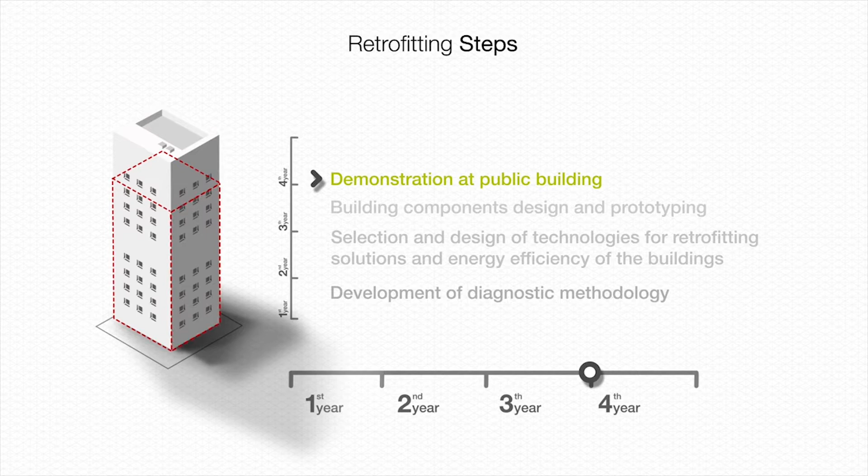RESSEEPE Project. Nowadays, public buildings have a huge impact on the total energy use in Europe. The EU, through the funding of the RESSEEPE project, aims to reduce this energy consumption and, in consequence, to reduce the CO2 emissions due to public buildings. RESSEEPE is a 48-month project. After the development of the diagnostic methodology, retrofitting and energy efficiency technologies are designed and demonstrated at building level in different demo sites. At the end of the project, the impacts of the technologies developed were assessed and their replicability evaluated.

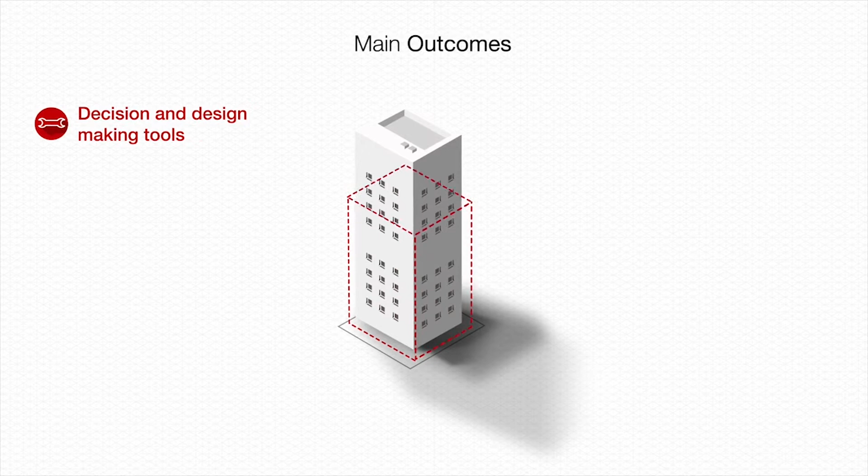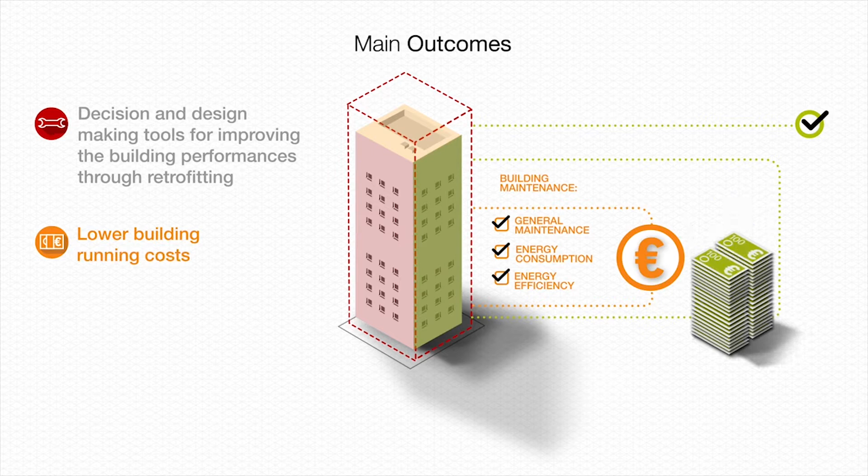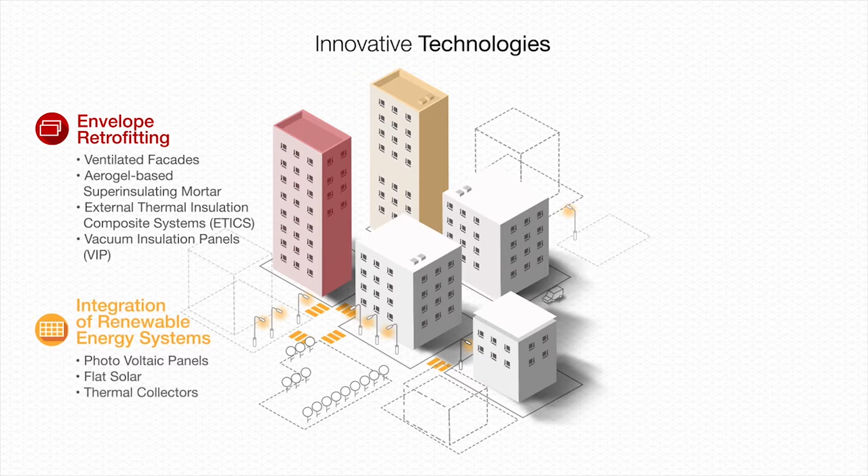The main outcomes of the project were combined decision and design-making tools for improving the building performance through retrofitting. This approach lowers building running costs and provides a technologically affordable cost of entry. A standardized low-energy concept deployed in the demo sites and the best practice approaches highlighted in a book. Several remarkable innovative technologies and materials have been integrated into the retrofitting process as an existing technology, improved or new prototype design. RESSEEPE demonstration sites. The first demo site is Balderskolan Secondary School in Skellefteå, Sweden. The second demo site is composed of 2 hospital districts in Barcelona, Spain. The third demo site is composed of 2 buildings in Coventry University, UK.

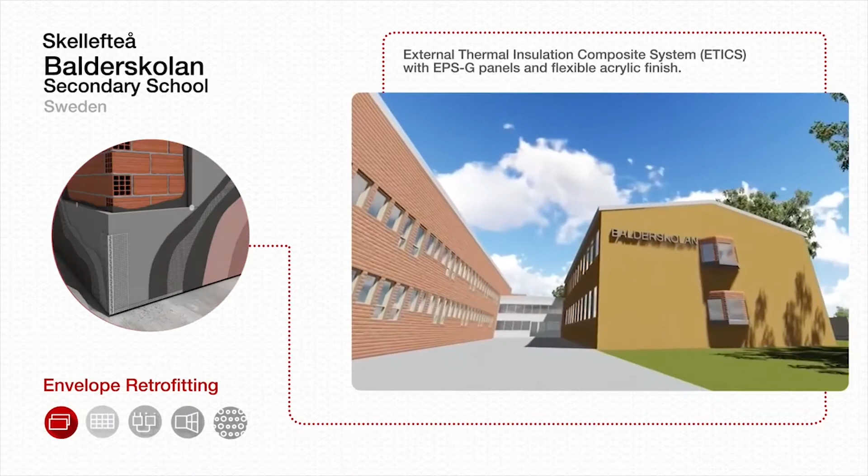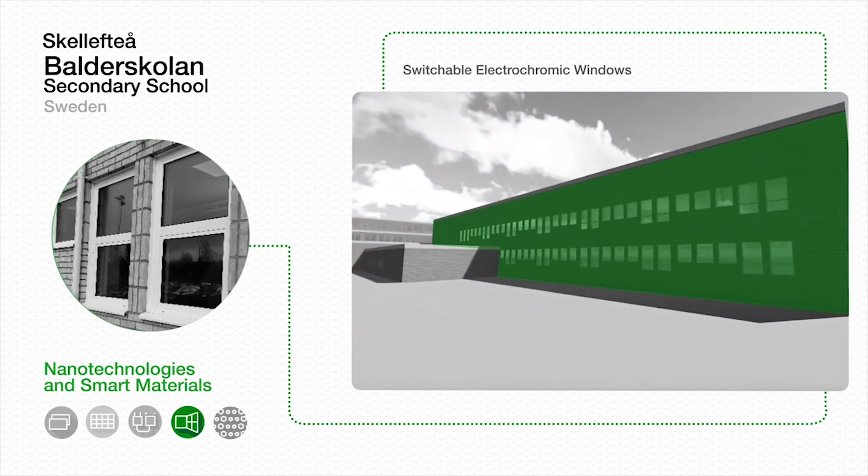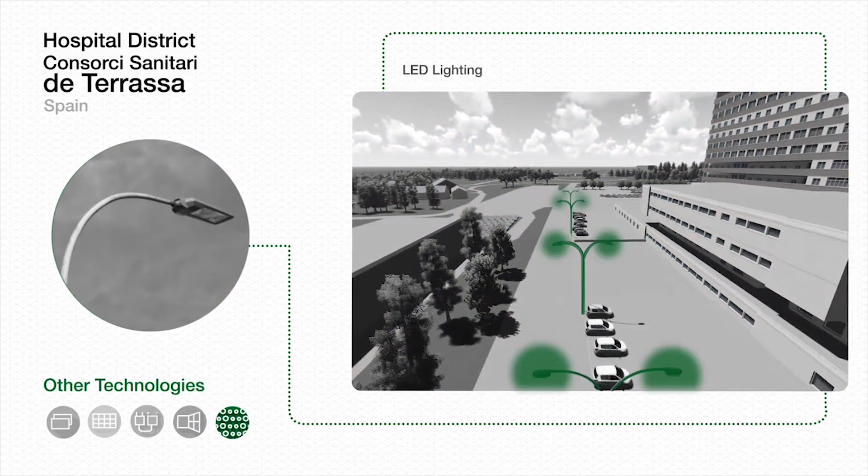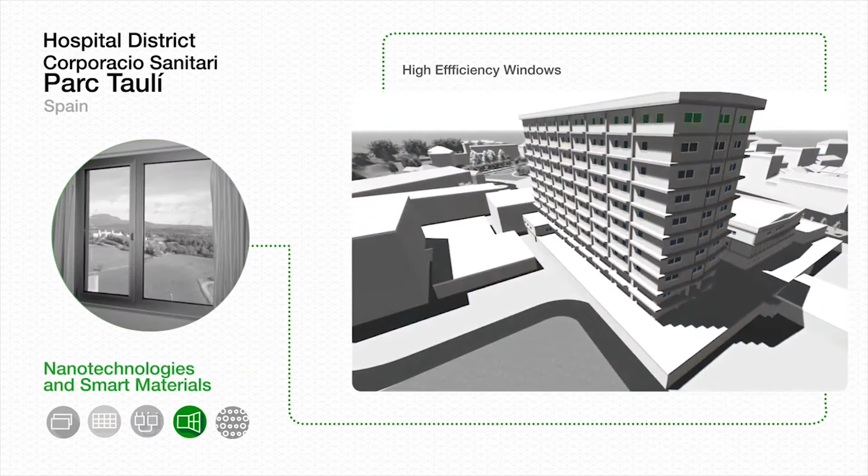The efficient technologies included are: Balderskolan Secondary School: external thermal insulation composite system, vacuum insulation panels, high energy efficiency windows, switchable electrochromic windows, LED lighting. Consorci Sanitari de Terrassa: external thermal insulation composite system, thermal solar plant for DHW production, high energy efficiency windows, LED lighting. Corporació Sanitària Parc Taulí: EPSG panel installation, thermal solar plant, high energy efficiency windows, internal and external LED lighting.

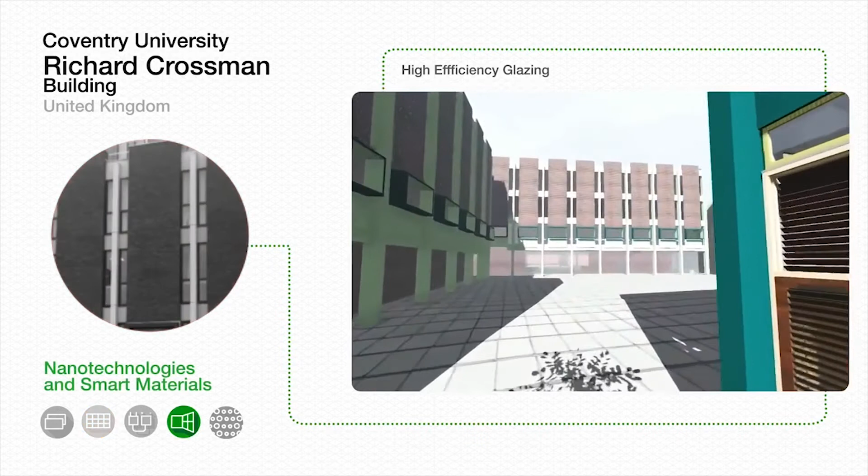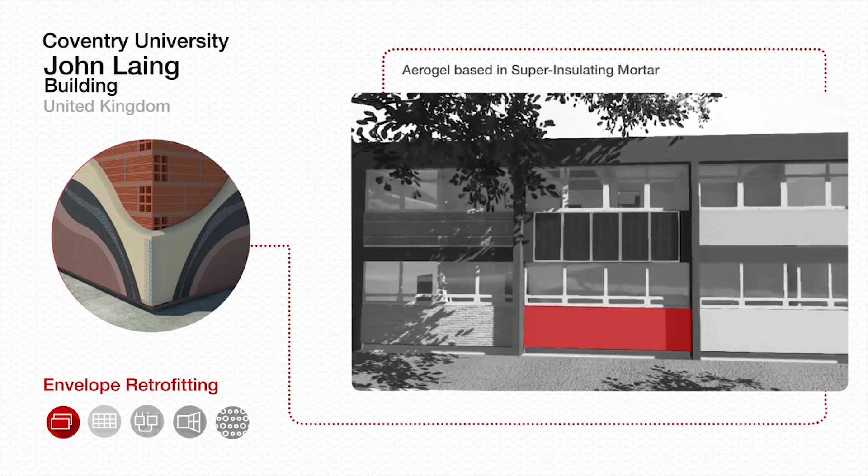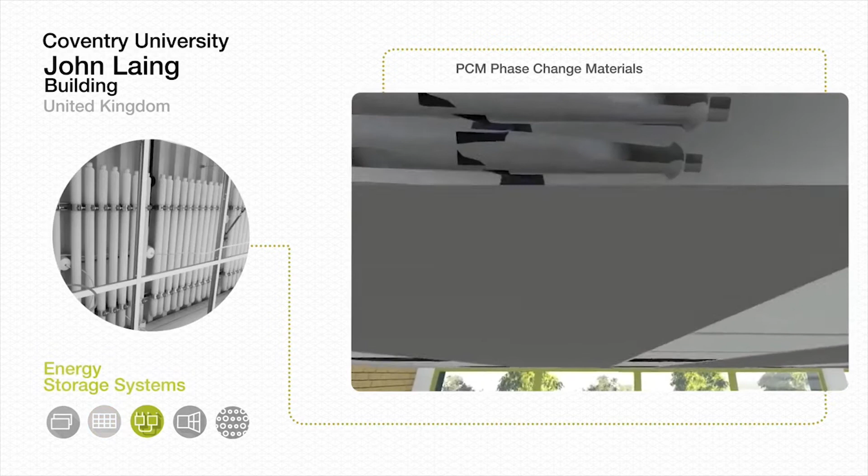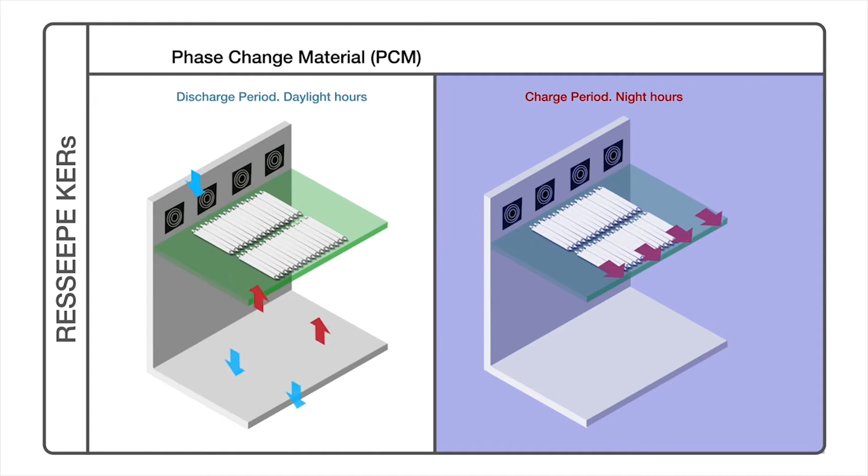Richard Crossman building: solar PV panels, high efficiency glazing, curtain wall, roof improvement, LED lighting, BMS Building Management System. John Laing Building: EPSG panel installation, aerogel-based super insulating mortar, vacuum insulated panels, ventilated facades, building integrated photovoltaics, PCM phase change materials, EC film. RESSEEPE KERs. Successful experiences of the project. All technologies have been tested and pre-qualified. The performance reporter and decision support tool retrofitting planner at the building and district level have been developed and tested. The prototypes developed have been fully designed, manufactured and tested in the demo sites.

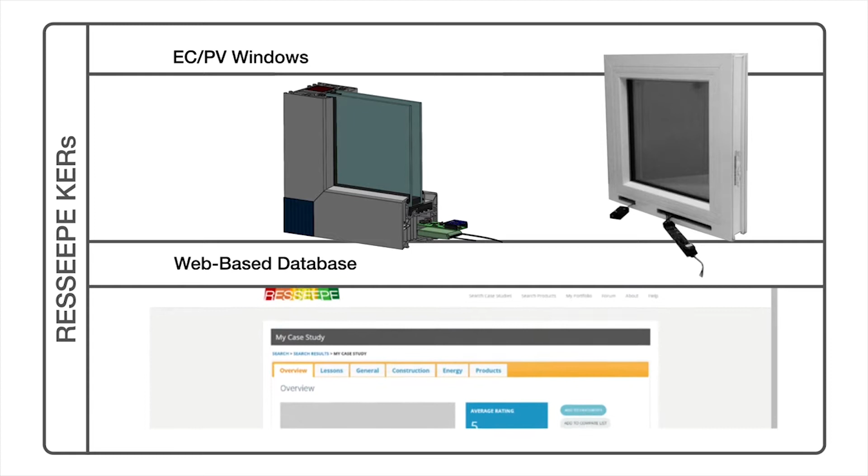I hope that's made the project a little bit clearer. So basically, I'm going to run you through some of the innovative technologies we selected within the RESSEEPE project. We consider these as key exploitable results because they started within the project. They started at a very, very low technology readiness level. During the project, they progressed quite well, and we've managed to demonstrate these technologies on the demo sites. So these are some of the technologies we've selected for the RESSEEPE project.

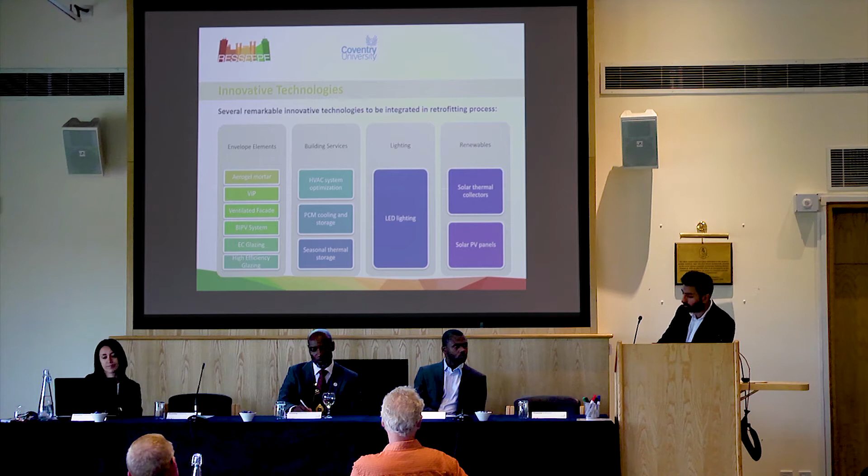We decided to choose different types of technologies rather than sticking to, say, external insulation. So we decided to go for some envelope elements, some building services, some lighting, and some renewable technologies as well. As you've seen previously at the John Laing building, we had aerogel mortar, vacuum insulated panels, the ventilated facade, which I'll explain a bit later on in the presentation, building integrated photovoltaics, electrochromic glazing, and high efficiency glazing as well. Regarding building services, we had HVAC system optimizations, PCM cooling and storage, and seasonal thermal storage. We chose LED lighting along with solar thermal collectors and solar PV panels.

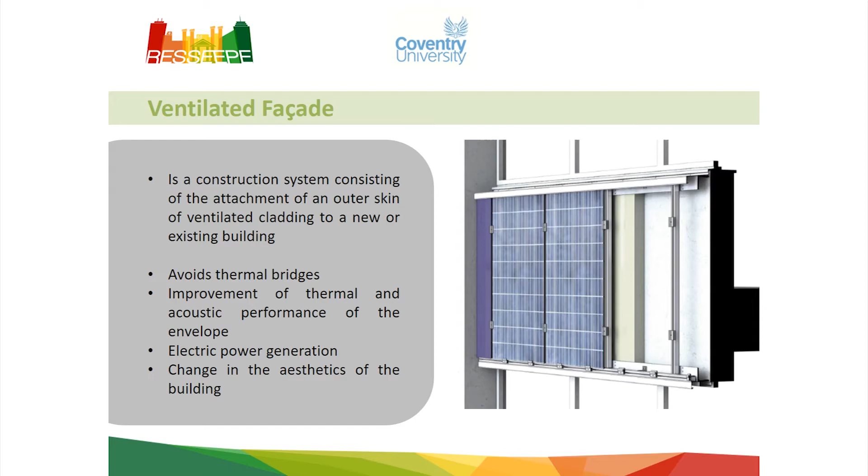So let me quickly talk you through the ventilated facade I think you saw at the John Laing building, which was the middle one. The ventilated facade is a construction system consisting of different elements. Within the system, we have building integrated photovoltaics, which were at the front. And we had an air gap for ventilation, and then we had vacuum insulated panels that were attached to the wall directly.

This system is very well-performing in the sense that it provides different energy measures and savings as well. Some of the advantages are they avoid thermal bridges. It has a very good thermal and acoustic performance, considering we're using vacuum insulated panels, which is a very good technology. We're producing electricity right now.

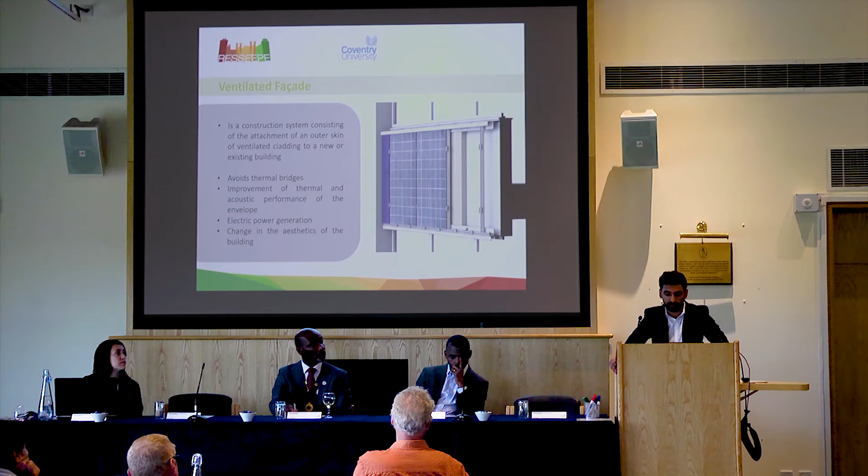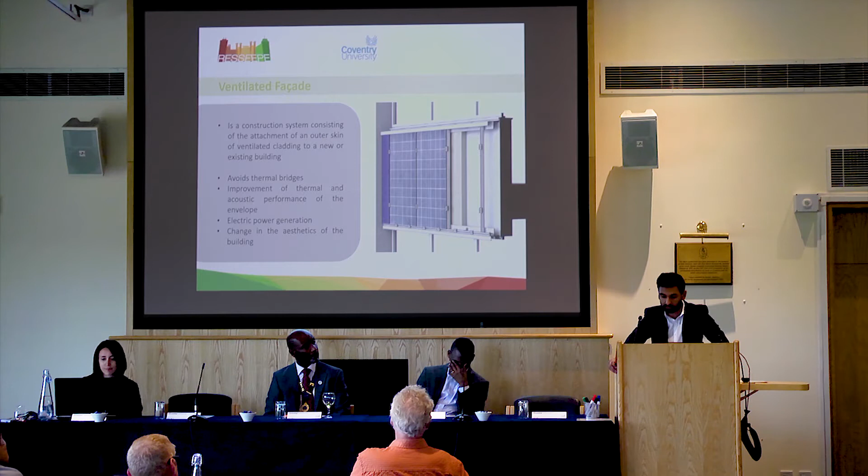We didn't have a chance to see, but the PV panels are connected inside the lab downstairs, just below the ventilated facade. So in that room, we have the inverter, we have the batteries in there, which at the current moment have a light bulb load connected, just for testing purposes, to see if the solar panels are actually producing some energy. So we'll be having results for that at the end of next month, which is the end of the project, hopefully.

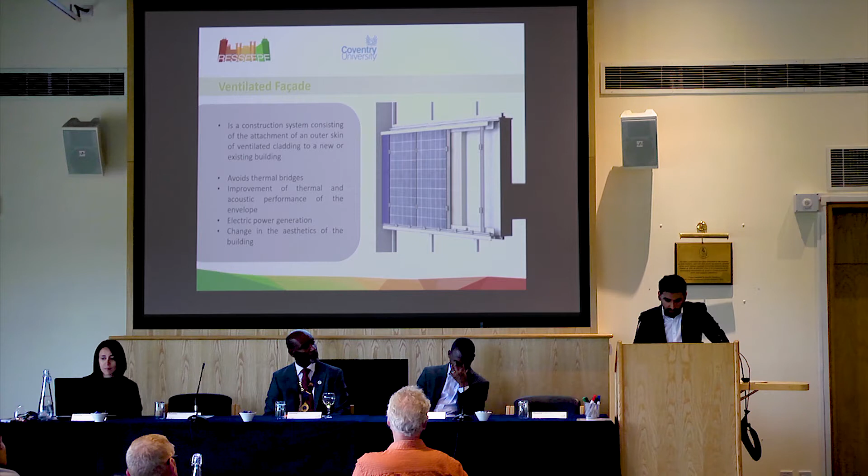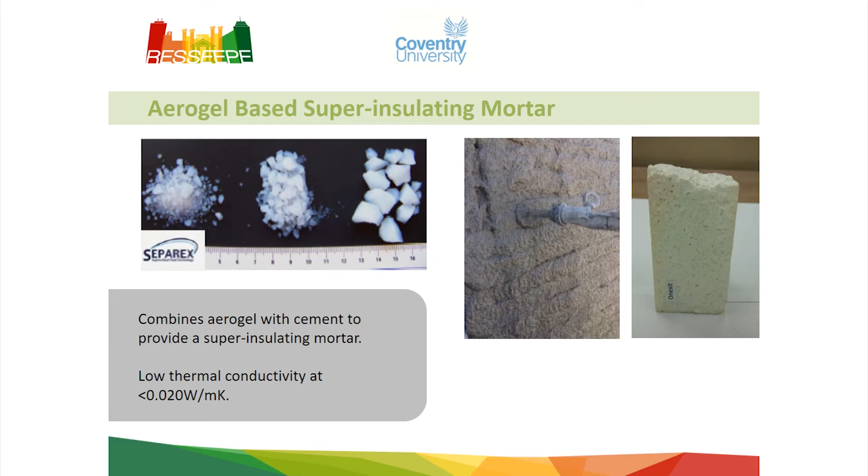So the next technology was aerogel-based super insulating mortar. This is a silicon-based product. I think it's 1% silicon, 99% air, something like that. So we decided to mix this into a mortar and install this at the John Lamb building. As we mentioned previously, the John Lamb building was used as a lab scale testing site.

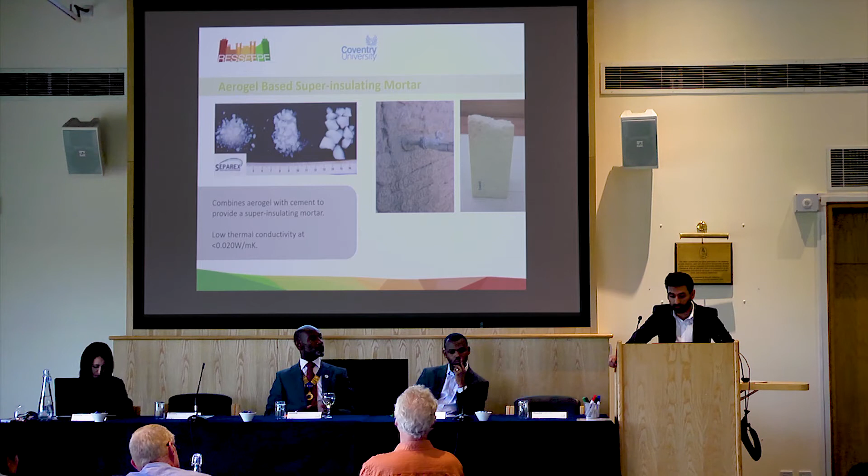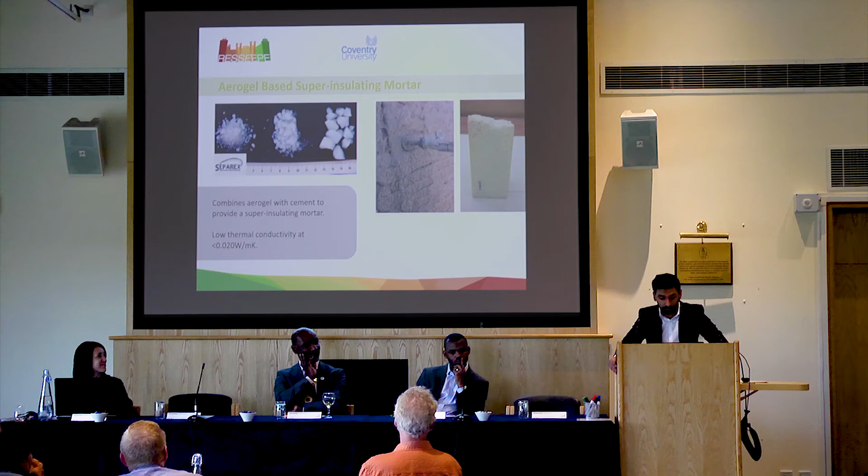So some of these innovative technologies we thought would be well tested at the John Lamb building. So this is one of the technologies we installed. I think Monica will cover the installation procedure, but it was a very difficult technology to install, as not a lot of people know how to install this technology or know about this technology. But this will be covered later on.

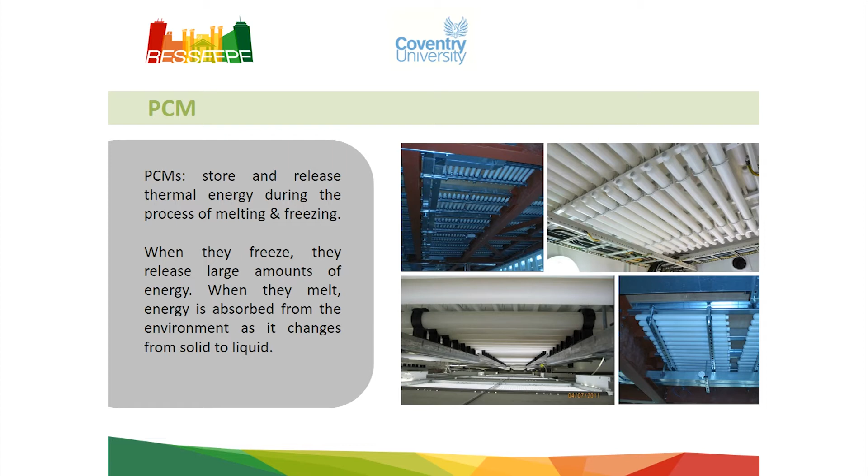PCMs, I guess you've had a lot of information about PCMs today. They basically store and release thermal energy during the process of melting and freezing. Obviously, when they freeze, they release a large amount of energy. When they melt, the energy is absorbed, going from the state of solid to liquid and back again.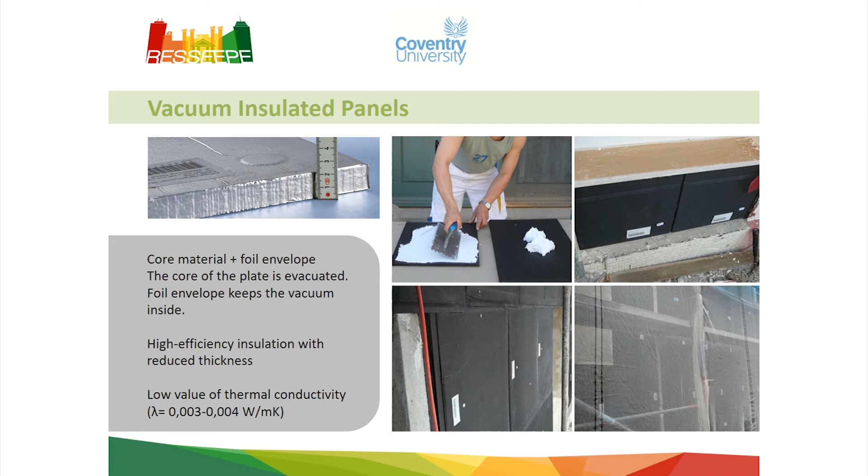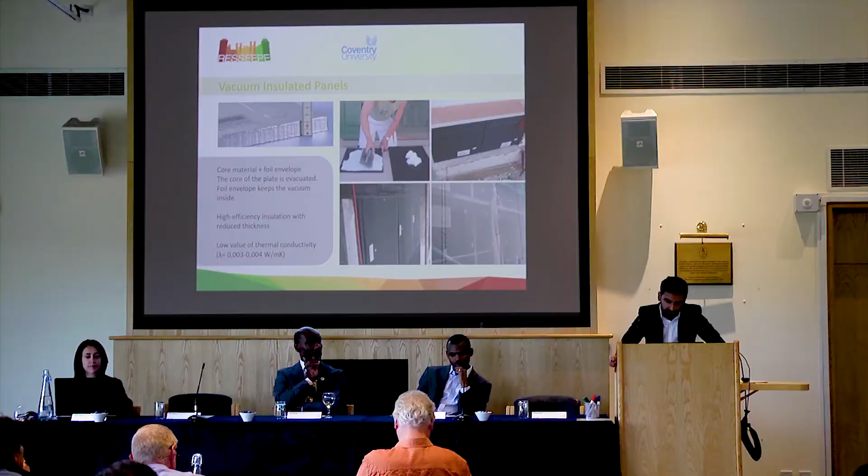Vacuum insulated panels. I'm not sure if you can see through the ventilated facade, but it's a foil-based material. So the core material is in a foil envelope. The core is a fibery material. It's quite powdery as well. So the company decided to use it as a vacuum. So we took all the air out, vacuum packed it. It doesn't allow air to go through at all. It's high efficiency in insulation and has a very low thermal conductivity.

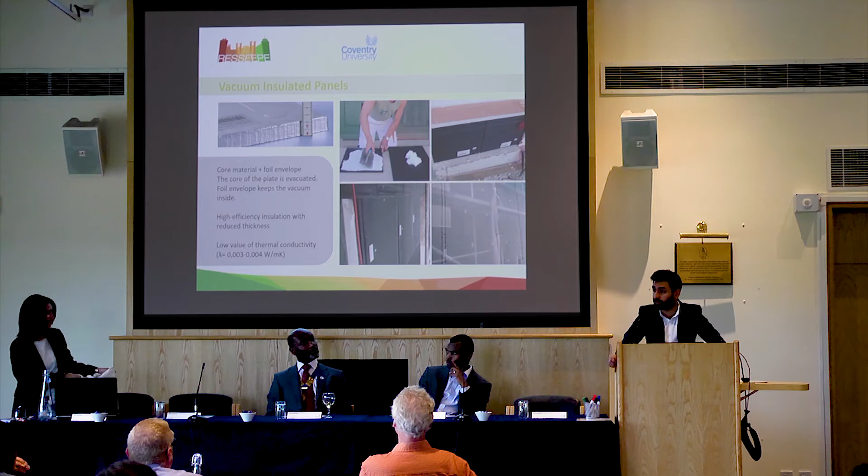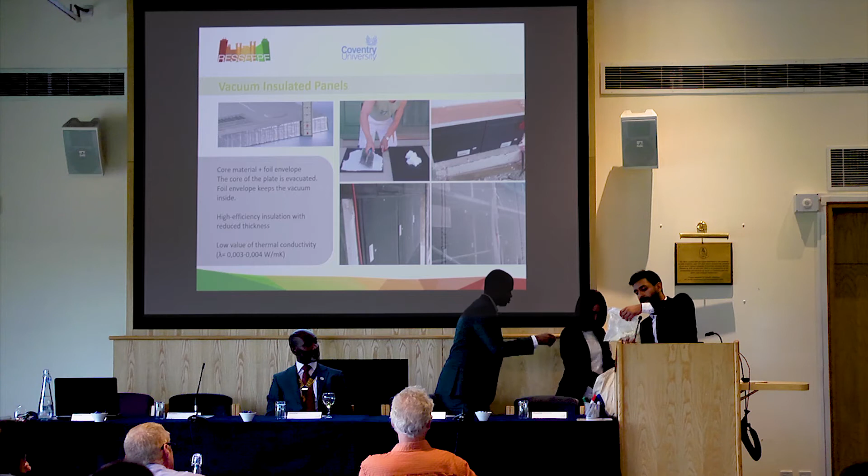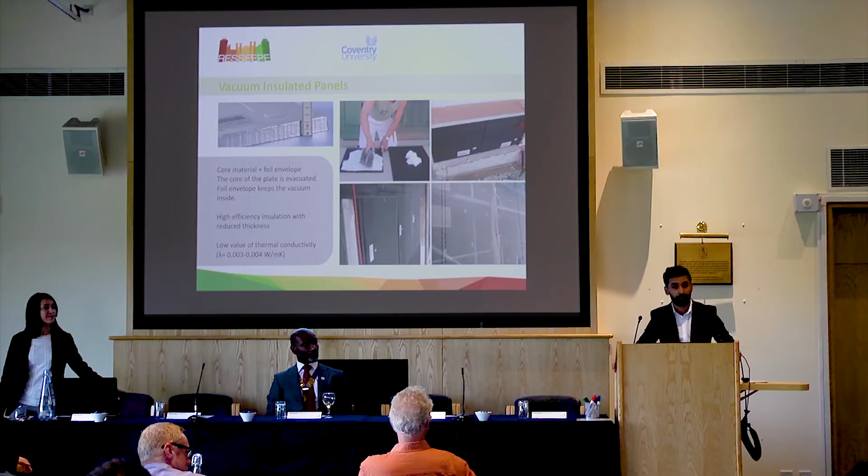So this is a very well-performing technology, and we are seeing this in the results at the moment, and hopefully we'll be seeing them in our final analysis. I think Monica has a few examples there she'll be passing around. That's the aerogel mortar. That's the mixture it comes in. So the powder stuff in the bag, that's the aerogel mortar. You just have to add water and then it's ready for installation.

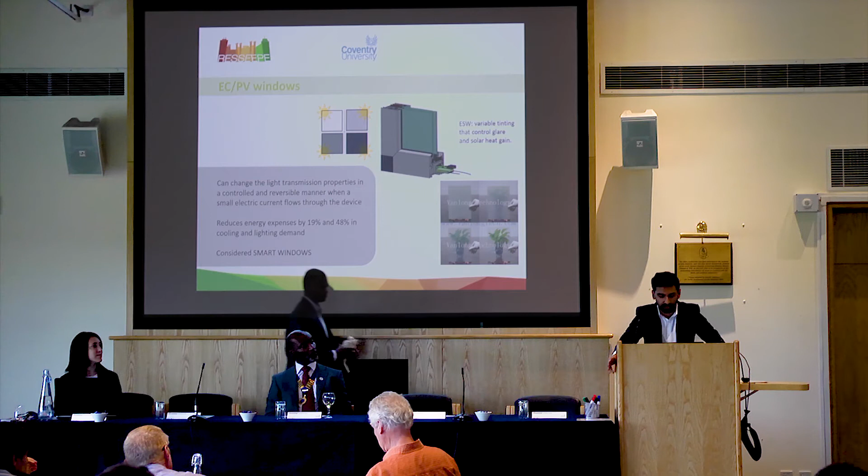So while you guys are looking at the samples, I'm going to carry on. I'm going to continue. I guess we'll stay on time.

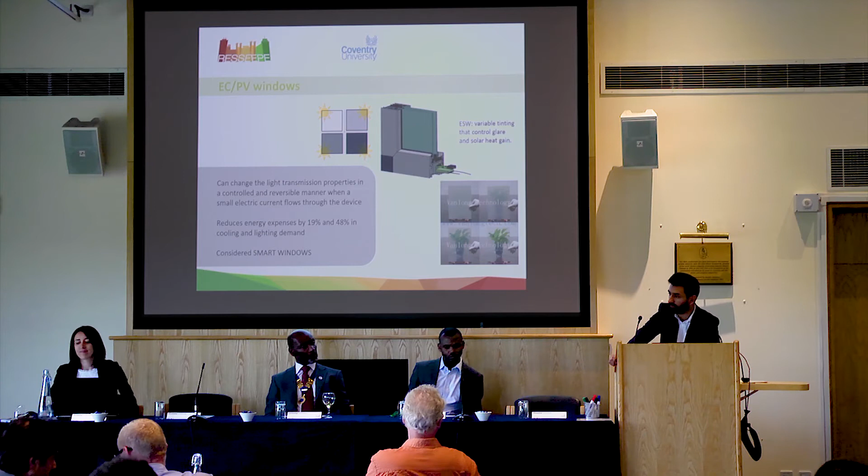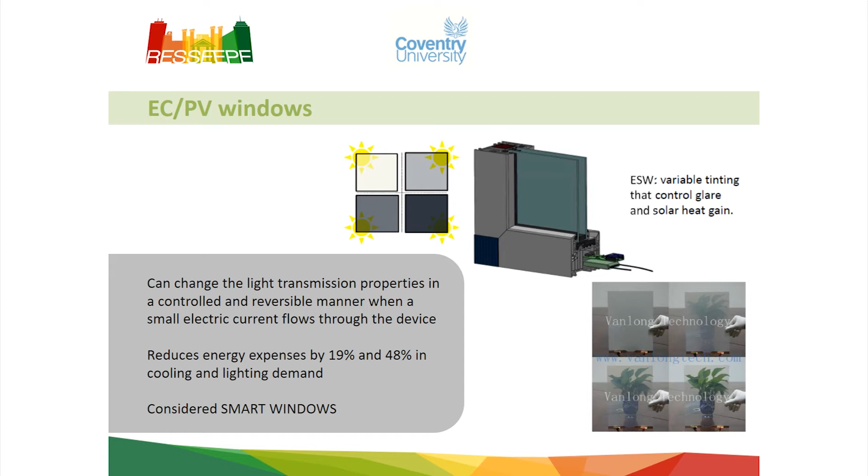Yeah. Right, another technology that was made as a prototype in the RESSEEPE project was electrochromic windows. This was done by a partner in Switzerland, if I'm not mistaken. They created their own EC window. They did their testing in the lab for this. Unfortunately, it was not ready for demonstration testing, so they could not make an electrochromic window building-size for a normal window. It was roughly around this big, 30 centimeters by 30 centimeters. So we could not put that at a demo site to install and do the testing.

So they did some lab testing, and they found that it was very efficient. It reduced energy expenses by 19% and 48% in cooling and lighting demand as well. This was the prototype. For demonstration purposes, we decided to get a commercial product, which they claimed to be far more different to the regular electrochromic windows they have in the market. So we're currently testing this at the Skellefteå demo site.

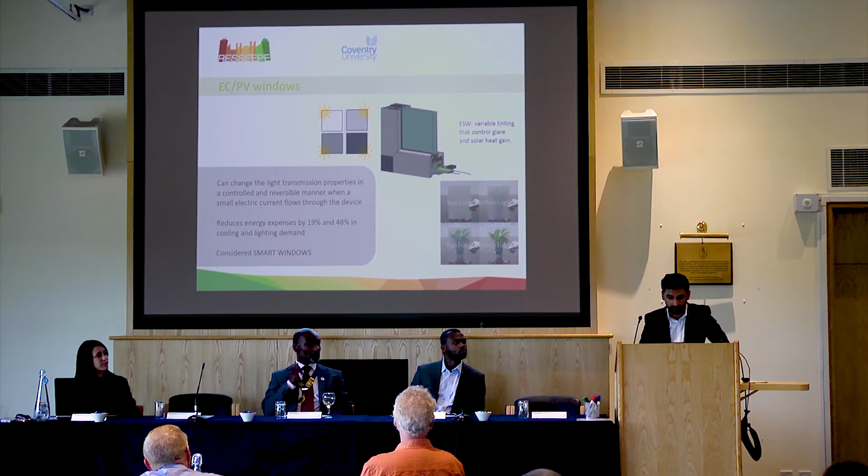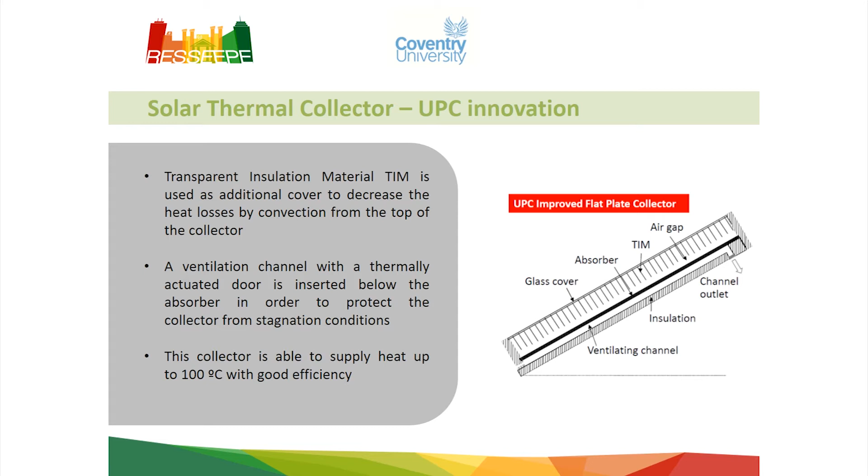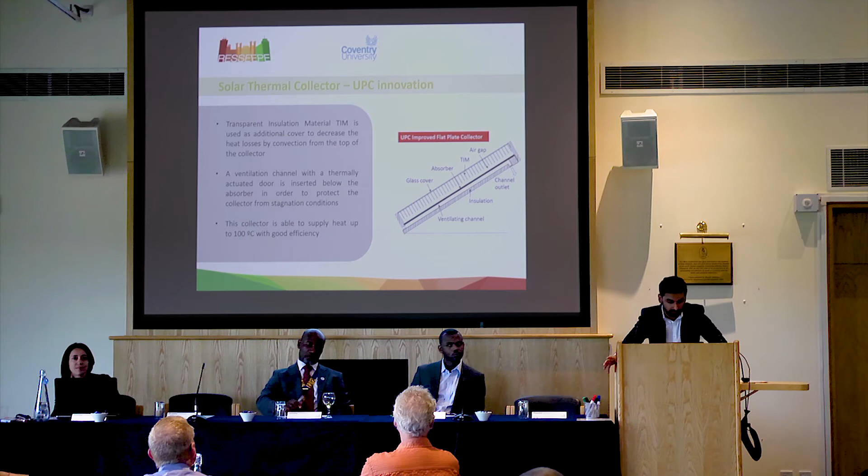Another partner in the project, UPC from Barcelona, was working on a prototype for a new solar thermal collector. This solar thermal collector had a transparent insulation material. As you can see in the diagram, it's right there in the middle, between the glass cover and the absorber. That was their innovation. They're currently testing that at the Barcelona demo sites as well. So the monitoring for that is happening, and we're getting some results in as well.

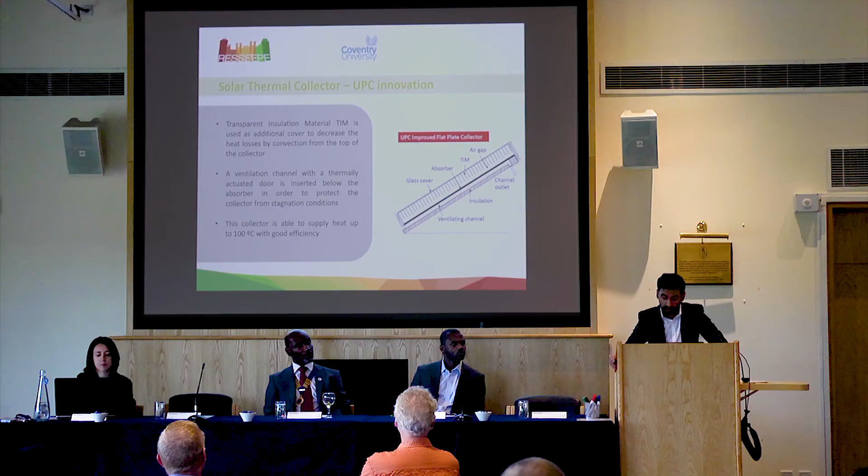It's said to be, if I'm not mistaken, 30% more efficient than a regular solar thermal collector. So hopefully the results will come through, and you'll be able to see in the coming months the real effect.

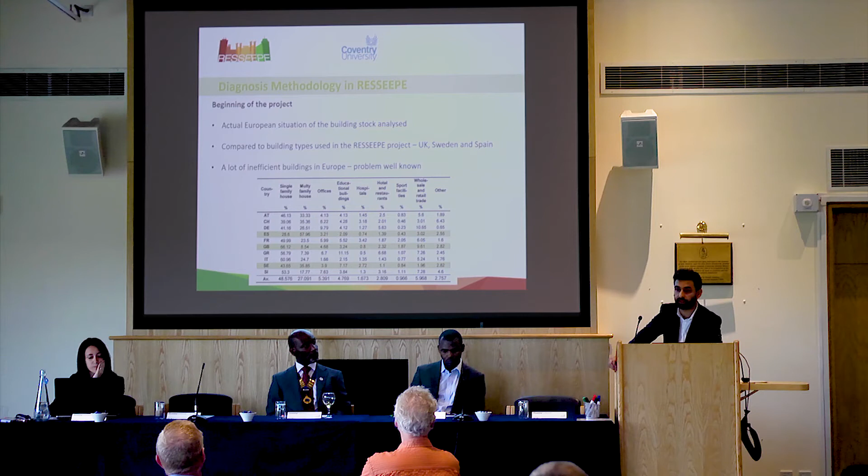So I'm going to move on to the diagnosis methodology, how we went about selecting the correct technologies for the correct demo sites. Obviously, we had 3 demo sites from 3 climatic conditions. Some technologies, for example, a solar thermal collector, would not be suitable for a colder climate, because it would not be as efficient.

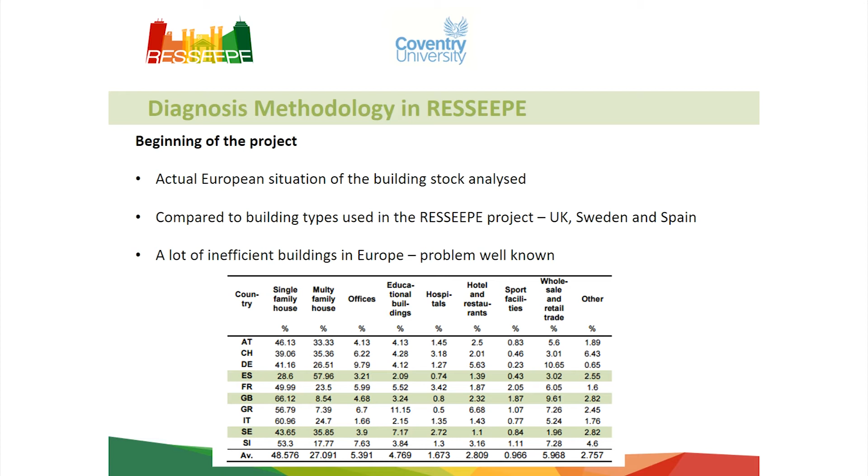So to diagnose the technologies we need, first we looked at the European building stock in the current market right now. We saw that across Europe, most of the buildings were inefficient, and there was not a lot of planning on retrofitting. So there was a lot of room for improvement for buildings, and we documented this in the project, and we took this forward for our research.

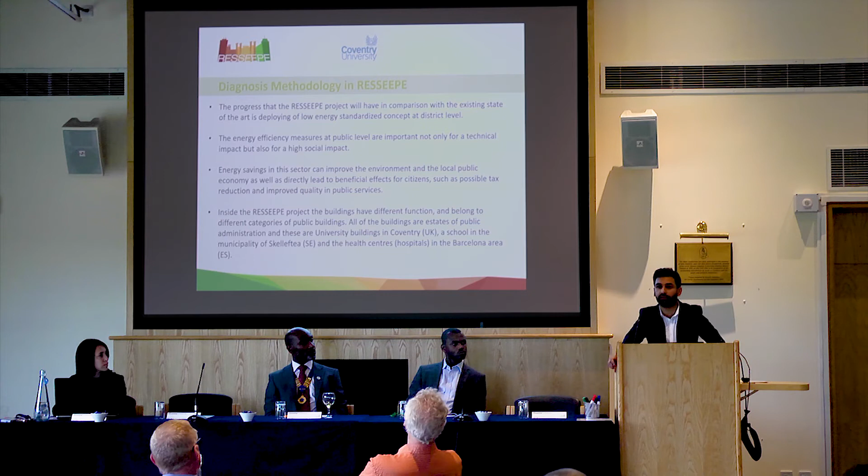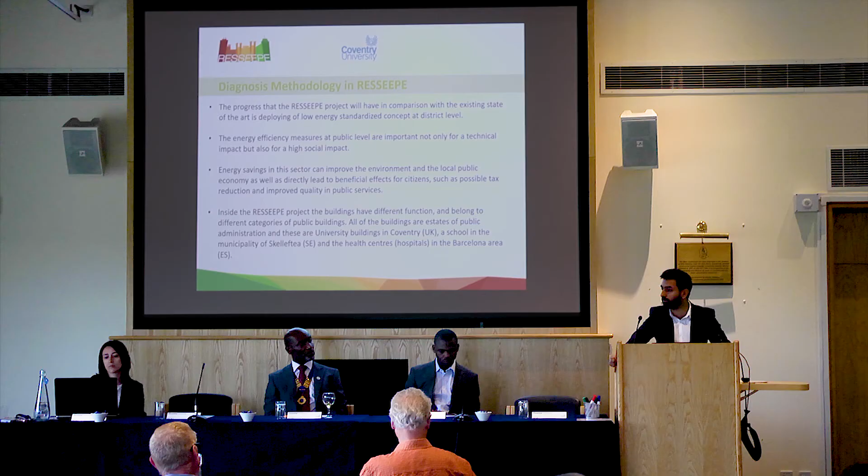So when it came to looking at technologies, we had to think about it at a district scale, not just domestic level or public buildings. We had to think about not only the technical impact, but the social impact as well. If we do install these technologies, yes, we'll be saving on energy efficiency, but what will the comfort level be of the rooms? Will occupants be satisfied with these technologies?

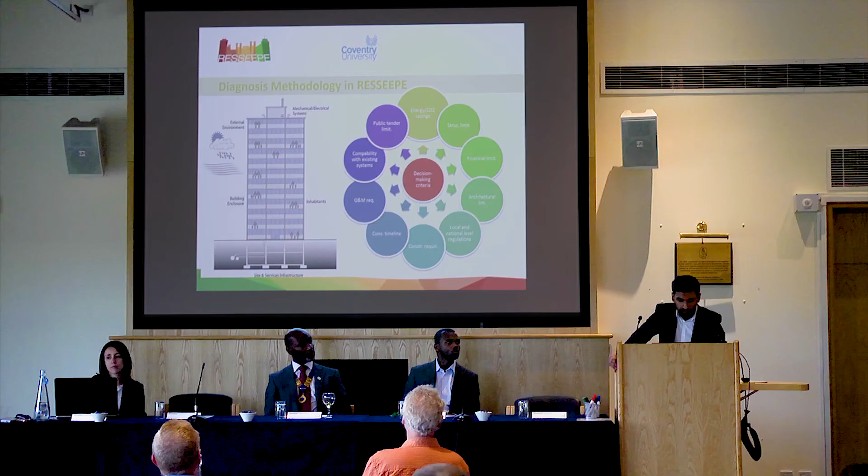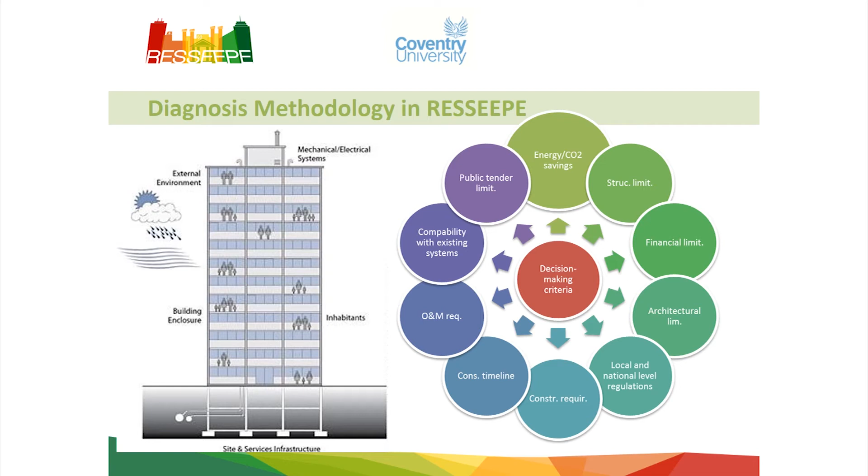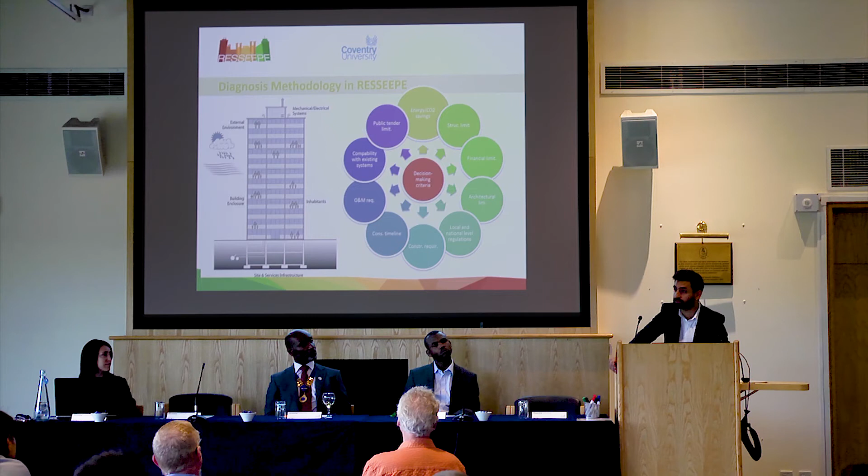This is some of the testing we did quite recently as well, with post-retrofit questionnaires and surveys, which Monica will cover later on. When it came to selecting technologies, this is the criterion, or some of the criteria we took on. So we looked at installing the technology not at a technical level, but we took on other criteria as well, such as the operational and maintenance requirements of the technology, the structural limits of the demo site, the architectural barriers of the demo site, local regulations.

Another big thing that came into mind was, are we able to get contractors to do these installations? Because some of these technologies were very, very new, very, very innovative. We found that not a lot of contractors were willing to take on the installation because they were scared, basically. They did not know how to work with it. So these are some of the criteria we took on.

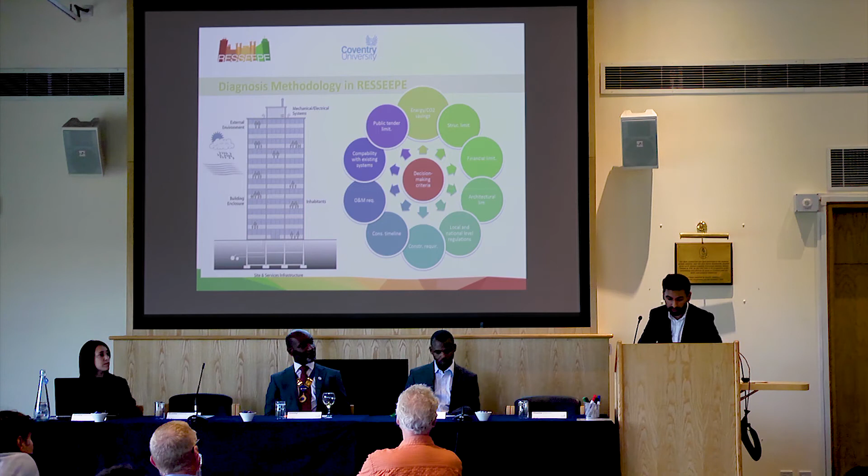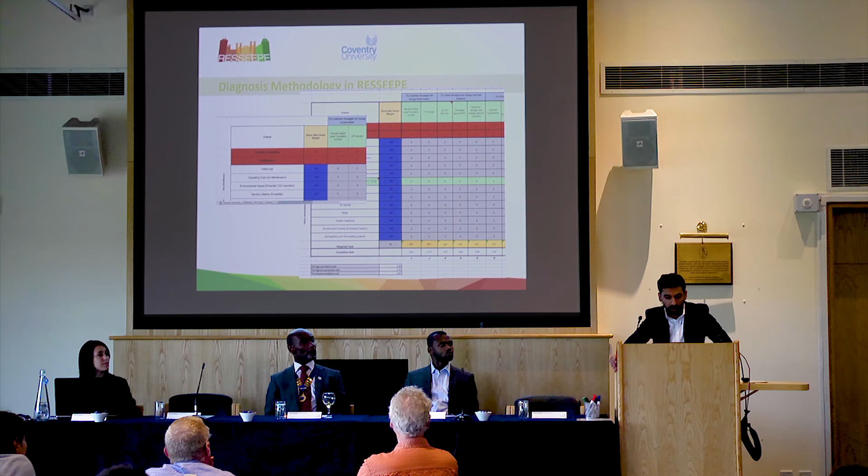And from here, we created a matrix, a demo site matrix. So each demo site was given this matrix with a criteria and a score out of 5. So the demo site owners, the scientific experts, the technology providers got together, worked on this matrix, and as a collective came up with a solution basically on which technology is best for each site.

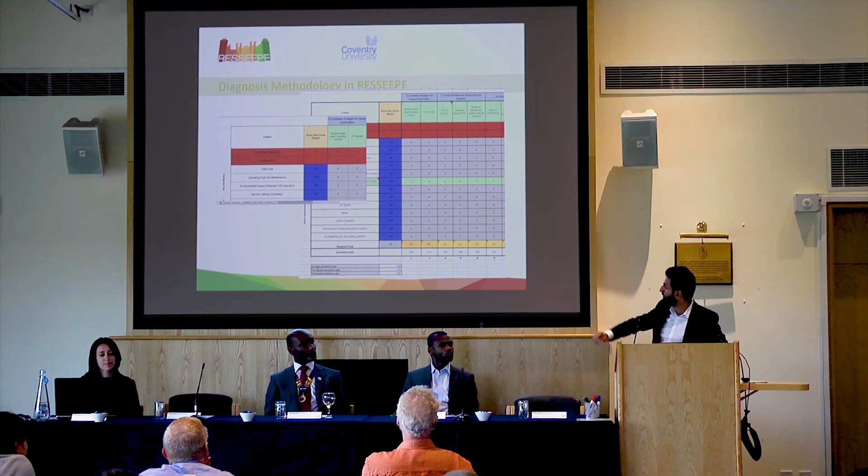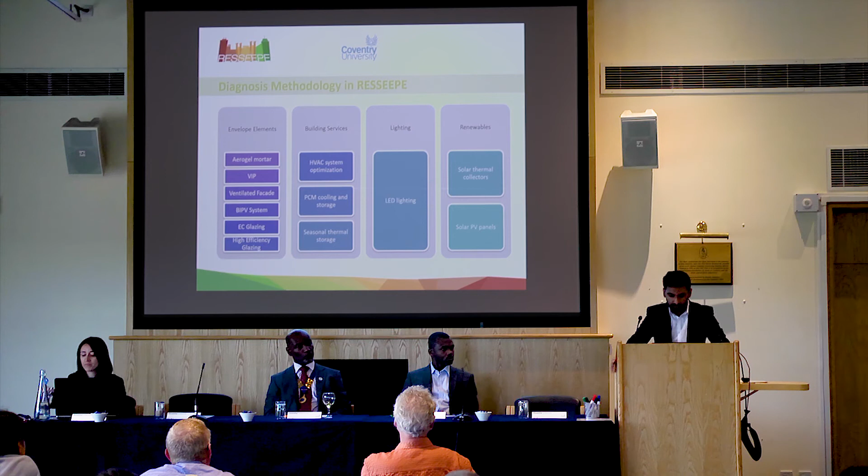So I'm not sure if you can tell from this image, I don't know if it's clear enough, but you can see the cumulative vote at the bottom. You can see a couple of ticks, a couple of crosses. That shows that some technologies are good enough for the demo site, some are not. So from here, these are the technologies that were chosen. I went through this earlier on.

And okay, so now we've chosen our technologies. We've selected our technologies for each demo site. They're all set in stone. How do we know it's going to be a good decision to install these technologies? So before we even went about installing these technologies, we had to do some simulations to prove that, okay, the energy efficiency will be improved. There'll be significant energy savings. So we created BIM models, then we created IES models as well.

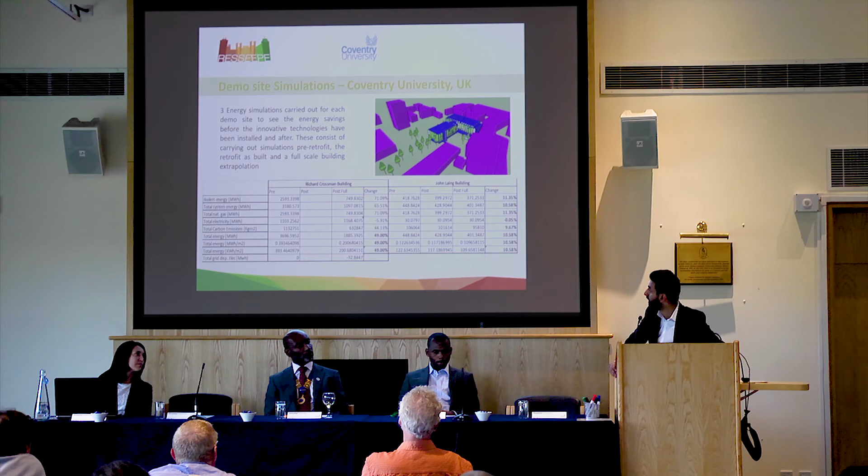So first we did a pre-retrofit simulation. So we did simulations on how the building is right now. You can see from the left-hand column, that's some of the results we got. Then we did a post-retrofit simulation. A post-retrofit simulation is where we do simulations based on the actual installation that is going to happen on site. So as you saw in the John Laing building, the 6 technologies that were installed, we did that exactly how they are right now and ran simulations like that.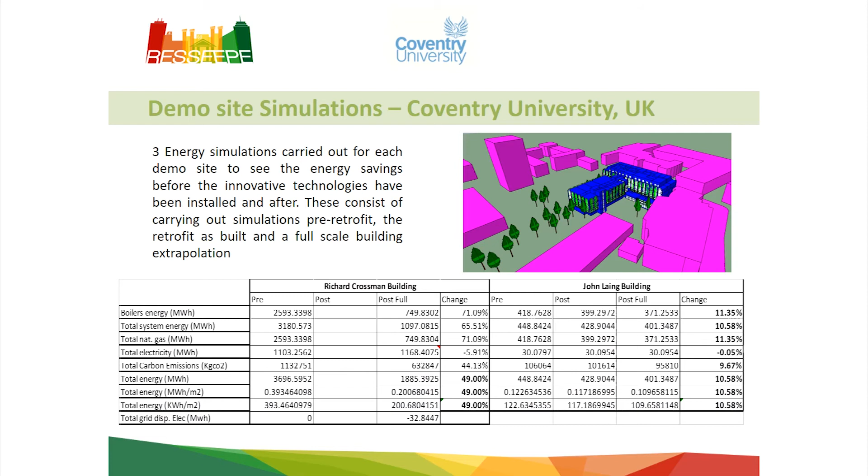Going forward, for more research purposes, we decided to do a full extrapolation of the building. So if we did have enough, say, money, enough investment to cover the whole building in these technologies, what would the improvements be? So there's the results for the 3 simulations.

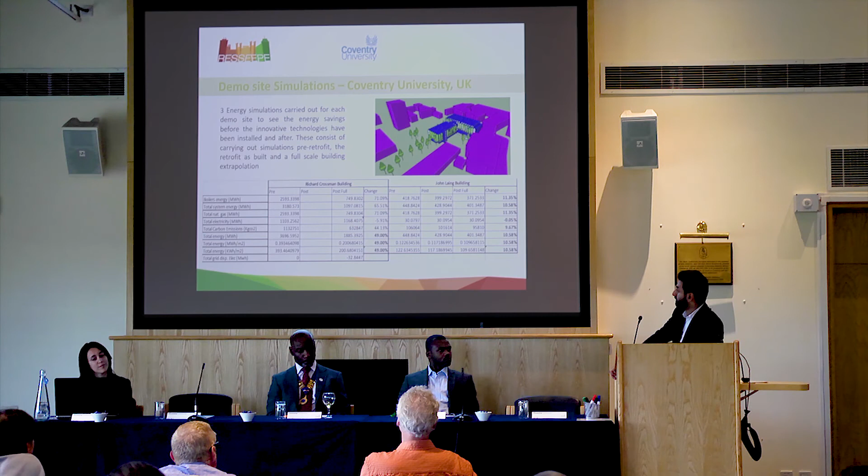As you can see, Richard Crossman building was an actual full retrofit, a full building retrofit, because the majority of the building, or the external of the building especially, was changed and improved. So with that, the simulations gave us 49% savings, which is very, very close to the target of the project. John Laing building was significantly lower.

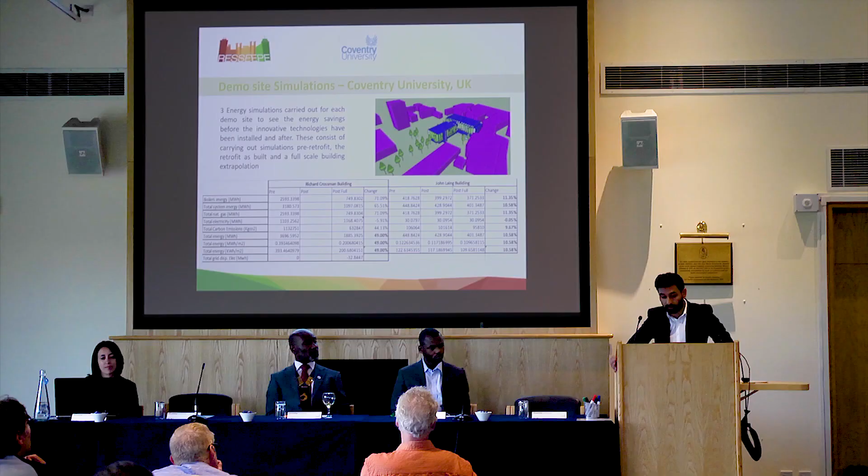This is due to John Laing building being used as a testing site for the new technologies. We didn't know how these new technologies were going to perform before, because the technology readiness level of these technologies was very, very low. They have not been tested before. So John Laing building was used for this. This is just the simulations. We're expecting the results to be far better in real.

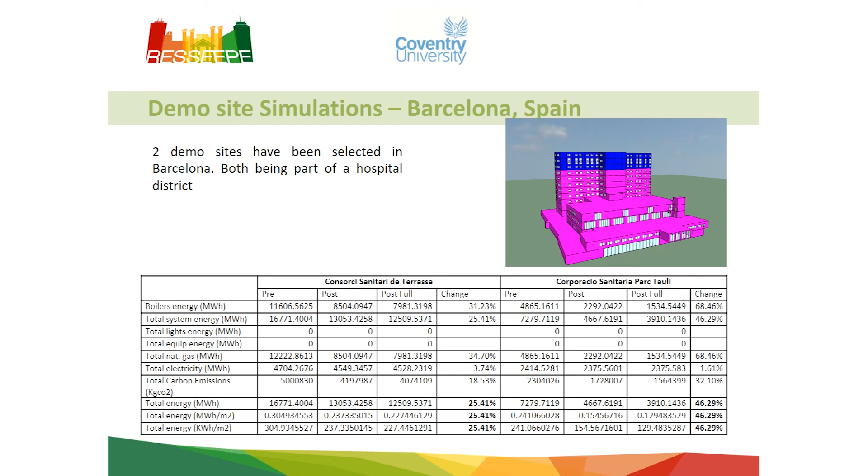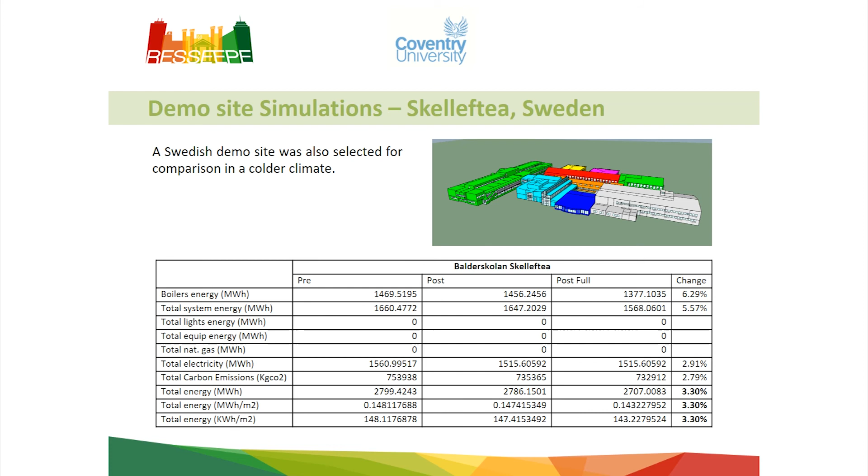We did this at the demo sites in Spain as well. So we got savings of 25% and 46% respectively at the Barcelona demo sites. And Skellefteå as well. We did the testing at Skellefteå, and unfortunately the savings were not as high. It's approximately 3.3%. This was due to the Skellefteå building being very well insulated to begin with, as they're a Nordic country. Very, very cold climatic conditions. Their regulations are very, very strict in that sense as well.

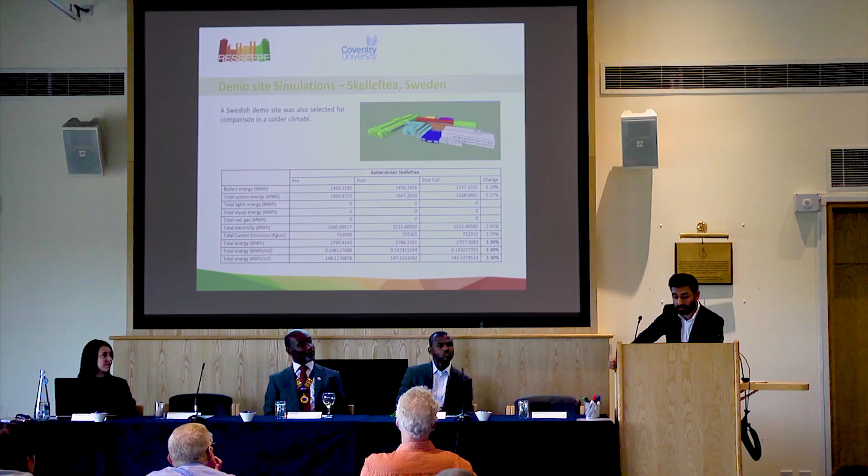So their insulation was very, very thick. I think the sample we saw of their walls was 500 millimeters thick. Yeah, the walls are 500 millimeters thick, and these are the older buildings as well. So I imagine the newer buildings to be much more efficient.